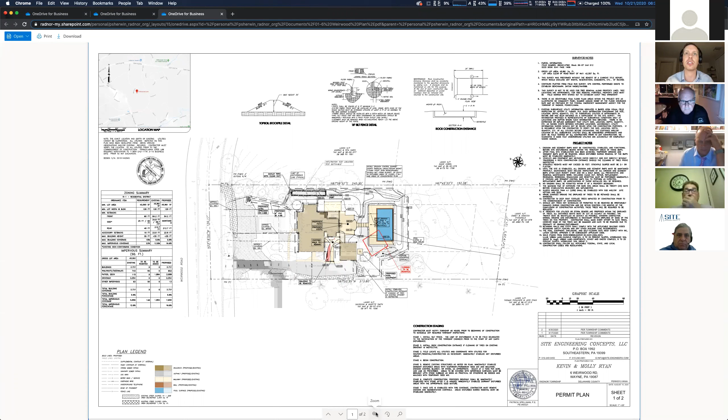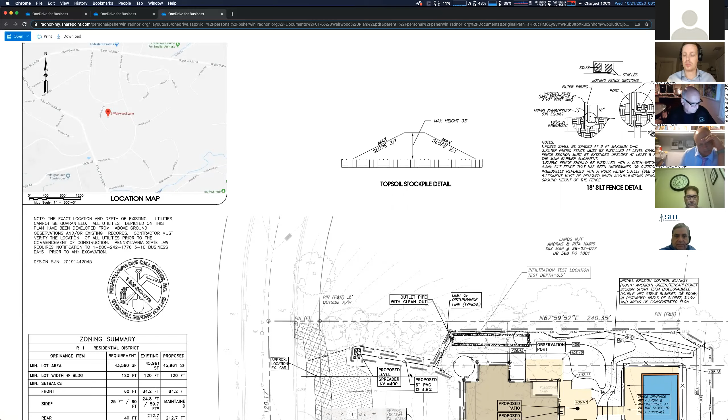What we just need to see is any tree protection, ingress, egress, and activity around those trees. If you could zoom in around the backyard pool area, including the driveway, that would be a good place to start. How's that? Good, I just have to move these pictures.

So what they're doing is putting in a pool and patio in the backyard. The backyard slopes towards the house, so we built a patio off the back of the house, sloping it away from the house, and having the water diverted around the pool. We'd come in from the driveway on the bottom of the page for access. There's a tree right there, and past the detached shed, another tree which they would like to protect. We have tree protection fencing there, and along the back, we have tree protection fencing.

Stop - that first tree you came by was there a year ago, and we surveyed it. No, I'm sorry, the second tree - go up the page a bit more. Yep, that one, stop right there, you can just see it. That tree apparently was damaged and had to be removed. There's another tree right behind it, which is being saved.

So the tree protection fencing is going to stay. Going to the top of the page and back down the side is the tree protection fencing along the swale that we need for stormwater. And then towards the middle of the property is a stormwater basin that is required for the project.

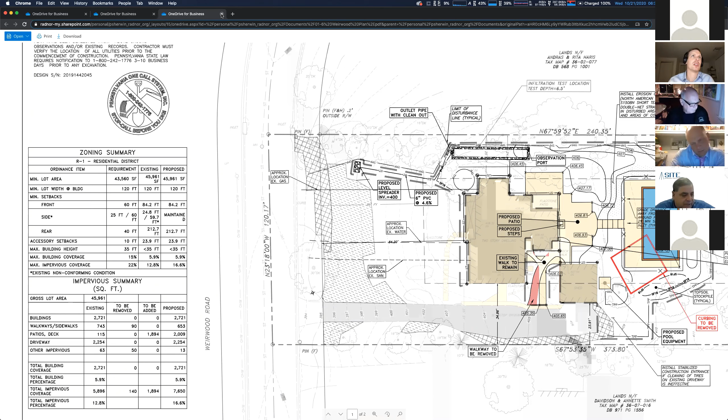Sounds good. All right, moving on to the next property address, 112 Dovecote, new dwelling.

Who's on the line? Seth, hold on a minute. Was that unanimous? Everybody said yes? I believe I caught everyone, but speak up. Thank you. I'll do the full video grid view so I can see it next time. Okay, thank you. Yep.

All right, anyone from 112 Dovecote on the line? Doug Knox here from Craft Custom Homes. Great. Hi, Doug. How are you? How are you doing? All right.

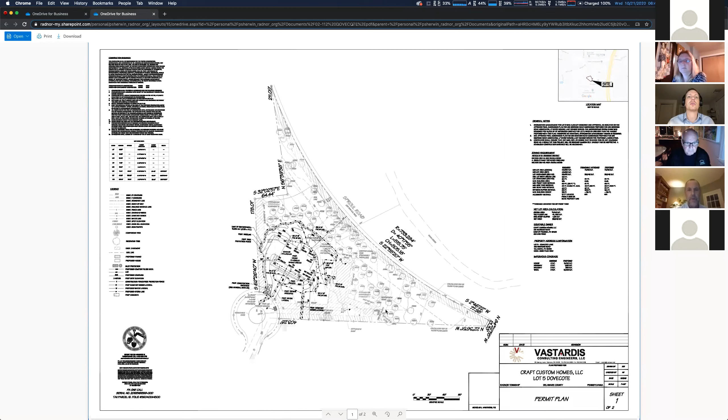Page 1 or page 2? Page 1 gives you a pretty good overview of the lot itself. Lot 5 is an approved lot, and I believe it's called 615 Newtown Road, the subdivision. It's the final lot within the community. We're staying within the boundaries established under the original approvals of the lot itself. You'll see there's a large stormwater management bed area off to the right side of the lot, and that system's already installed. It's part of the community stormwater system, so there's no more disturbance happening over there.

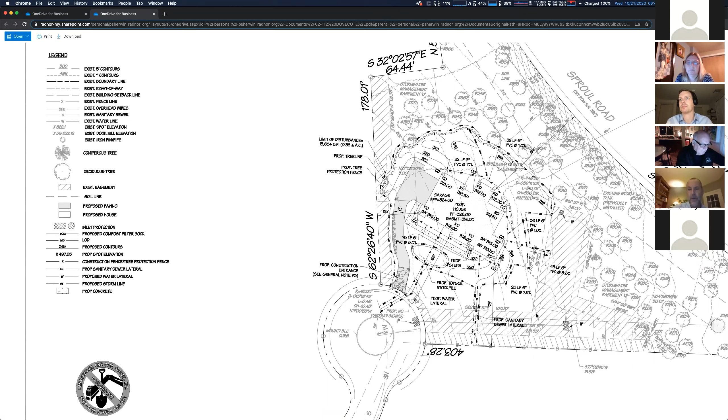We did submit an amended plan today based upon the engineering comments, and the tree protection and silt fencing have been modified to better protect that area.

Okay, Trish, do we have that updated plan by chance? It was not uploaded, no. Okay, I do have a copy I can share on my computer if you like. Yeah, if we could go ahead and do that, that would be great.

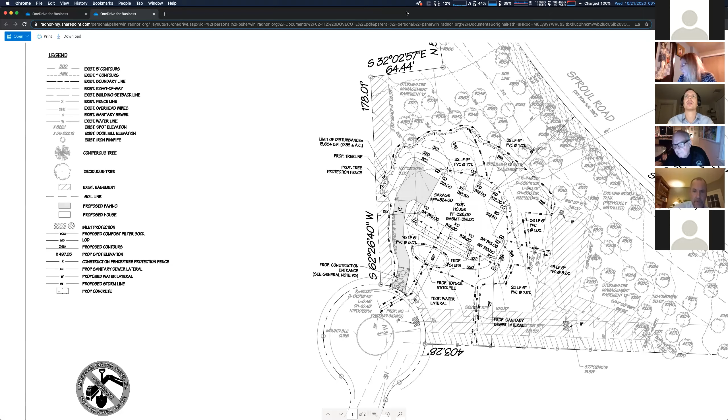I will stop sharing. Okay, let me go back into this. That's the pre-development there. Fine. There we go. Oh, come on back. Can you see this? Nothing yet. Yeah. Go back into the Zoom.

Doug, if you can't pull it up, maybe you can just walk us through what the resubmitted plans look like.

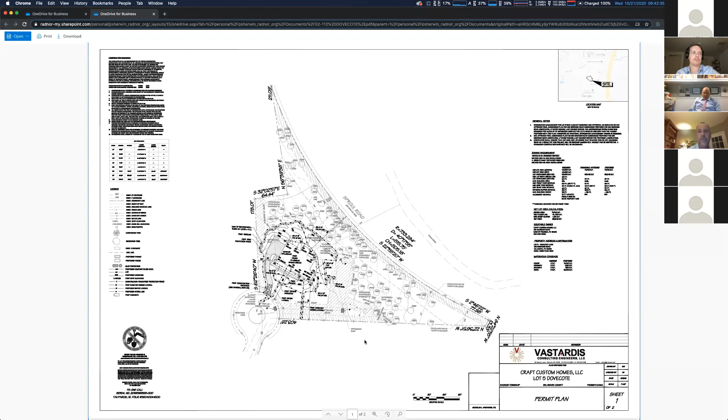Okay, what we found on the lot, due to the number of trees that were removed initially for the development of the community, there was a plan for trees being added to this lot. There's a white oak tree in the front yard, up by the curb line. We added that to the resubmitted plan and have tree protection fencing going around that. Then to the back left-hand corner of the driveway, there are 3 Norway spruce that were part of the tree enhancement package for the community as well. Those are also shown on the new plan with tree protection fencing around those.

And then some of the limited disturbance shown on this particular plan—we do need to grade the front yard some, and this was basically showing that we would not be working in those areas. We had that modified as well so that we could grade the front yard properly.

But you're not removing any trees, and there's no trees in the front yard. Correct, there's a tree in the front yard that was planted by the developer. It's a smaller tree. No large mature trees, correct.

Great. I'm going to interject just for future reference for any consultant: if you send us a revised plan the day of the meeting, during the busyness of the day, that's probably not going to make it onto the agenda to amend it. No, I understand. We require a week out. So I just want to make sure everybody understands, when something comes in along with the other 50 plans that come in during a day, that's not going to work for something like this. So that's why we're stepping through it as we are.

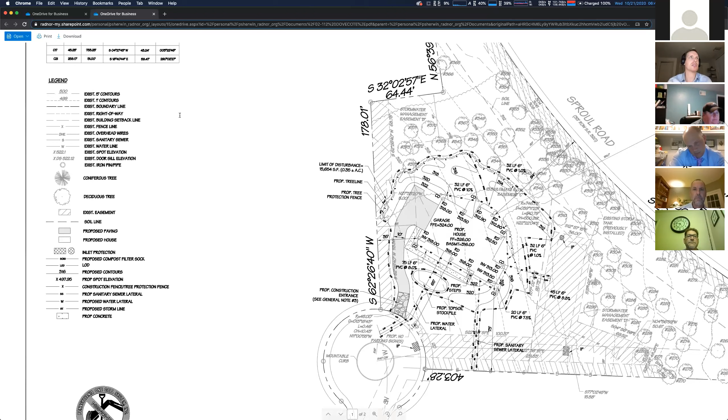Sure, yeah, I'm fine with that. Any concerns from the commission? No. Okay, all in favor of approved with revisions as mentioned? Aye. Aye. All right, thank you, next.

Next address on the agenda, 27 Fariston Road. And who do we have to represent this property?

If you're speaking, you may be on mute. Oh, there you are, hello. My name is Chris Yohn, I'm the civil engineer for this project. Hi, Chris, how are you? Good, how are you doing?

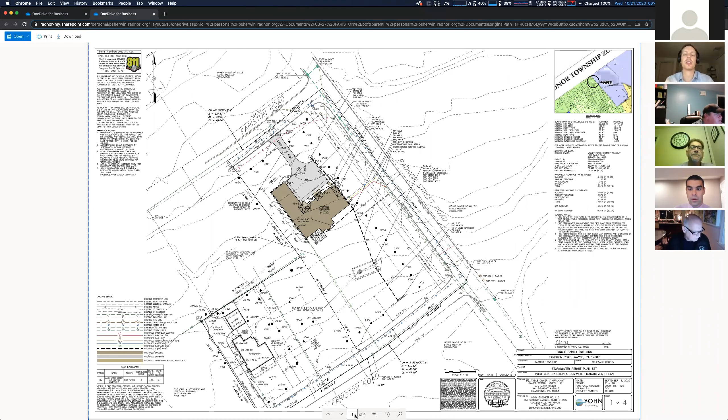Good. So really, we just need to see ingress, egress, what dirt you're moving, and any tree protection you may have. Is there a particular page you want me to go to? We can start with sheet 1. Okay, so right now this is a vacant lot.

You can see the trees that are there are these black dots. This in brown is the new house, a new driveway, a new single-family dwelling. There's grading shown on the plan, although not a lot of grade lines. The way the site grades actually works fairly nicely with where we're putting the house. There are a few grade lines on the left-hand side of the building just showing a swale along the side of the house. Same thing on the right, but we're basically holding the grade at the back, filling a little for the driveway courtyard in front.

The intent is to keep all of the existing trees. We don't have any designated to be removed. There's a nice row of dogwood trees along the existing street here, kind of pushed back behind the right-of-way, behind an asphalt walkway, but the goal is to keep those trees. I know the development's pretty close to some of them, but we're going to try to keep those. So this is sheet 1.

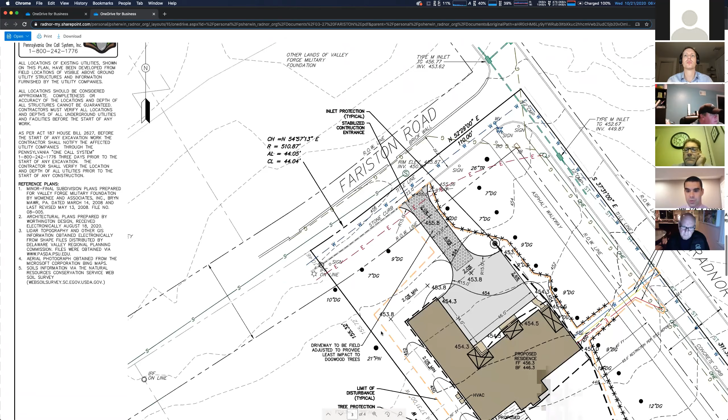I believe if you scroll to sheet 3, you'd have the tree protection fencing, that's the line with the X's through it on the right-hand side of the building. Is the tree protection currently installed, or is it to be installed? I don't believe it's installed yet.

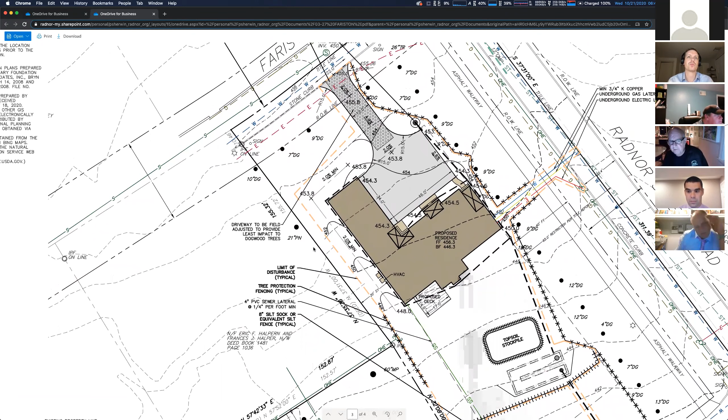Okay, Matt, did you get a chance to look at this? I did, and my only concern was the neighbor's tree. They have a couple of trees pretty near the line of disturbance, so I don't know how close construction is going to get near that line. If it's not going to be involved with those trees, that's fine the way it is, but if it is, I would like some protection for the neighbors.

Just to think, there's tree protection down by the 60-inch maple, I think that is. You talking about the Halpern residence? Yes, correct. I couldn't tell how the construction is going to impact those trees.

But if it's possible that it will, I would protect them in some way, Chris. Okay, we could add some additional protection. We do show some for the 60-inch maple, but we could show some tree protection fencing by that 21-inch pine as well, if you think it's necessary.

Matt, I have it up on Google Earth here. It looks like that 60-inch maple, probably a red maple, and the 21-inch pine. They're pretty far away. Yeah, they're far enough away.

And Matt, were there any concerns with the trees out front here by the right of way? No, like John says, they're pretty much out of the area of disturbance, I think.

Any other comments or questions from the commission? All right, so approved with that one minor addition around the 21-inch pine, if necessary. So all in favor? Aye. Thank you, Chris, appreciate it. Thank you for your time.

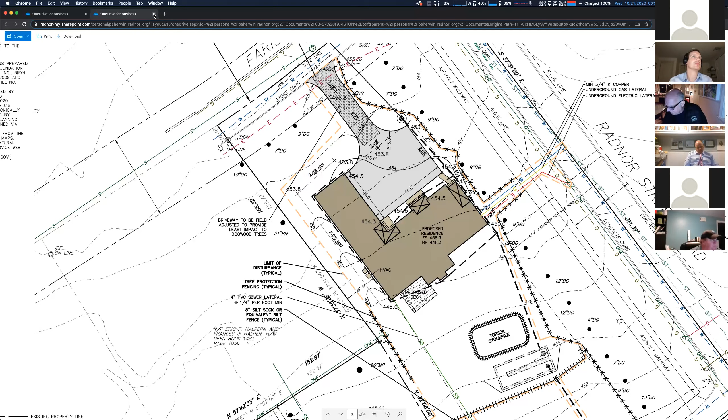All right, next on the agenda is 227 Windermere Avenue. So who on the line do we have to represent? Michael Neilio from Anthony and Sylvan Pools.

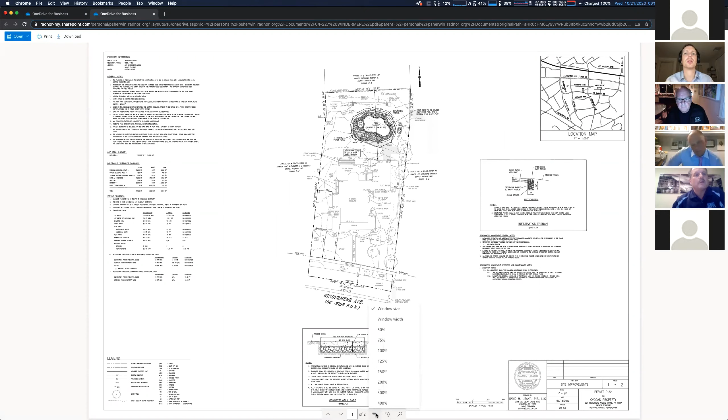Hi, Michael, how are you? Okay. So ingress, egress, where you're moving dirt and tree protection.

Which page, sir? If you go down to the street, that's page 1. If you go to page 2, it's got the tree protection silt fence detail, entrance detail. So we're coming in off of the road on the left-hand side. We have our stone construction entrance there. All the way up the left-hand side, the only thing from a vegetation standpoint is right on the property line, a little 6-inch tree there and a 4-inch tree. Nothing else until we get to the backyard where the pool's going.

We show our limit of disturbance around the whole project plus our silt fence. And the closest tree is this 48-inch tree right here, which the homeowner wants to do this project without removing that tree.

What about the 18-inch tree that's right below the pool equipment? Is that area where the pool equipment is going to be a patio? Right above that, is that going to be a patio, or what's going on there? You mean above the 6-inch? Yep, where the pool equipment is. Yeah, it's an area we usually level out. It's 8x5, we compact crushed stone on that 8x5 area and put down 2 precast pads, precast plastic pads right there that the equipment sits on, so that's going to be pretty level with the elevation.

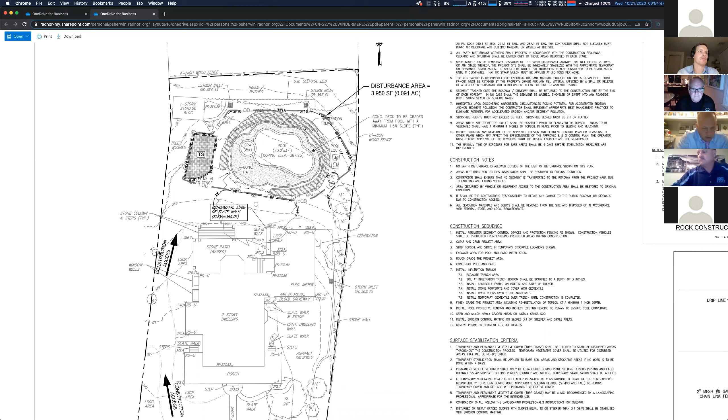That's pretty close. Yeah, you usually do. Yeah, it can be added, that's not a problem. I'll have them add the tree protection. So we're going to note the 6-inch tree is going to have protection, and it looks to be a 4-inch tree, correct? Yes.

Also, this is the homeowner, Nicole. Back by the pool, that 6-inch tree has been removed. Okay.

So in that case, technically, according to the ordinance, anywhere from a 6 to an 18-inch tree does need to have 1 replacement tree planted, that's 6 inches measured at diameter at breast height. Unfortunately, it's already been removed, but did you take a measurement at breast height by chance?

Seth, I don't believe they need to replace that. It's only if they did 5 trees or more. Correct, that is correct, my apologies. As a homeowner, they can do that. My apologies. We would like to see the tree replaced, though, I will say that. Yes, agreed.

Okay, so we're recommending tree protection on the 4 and 6-inch. Matt or John, any concerns with this large tree in the back? It looks like, if anything, there's going to be dirt and material added versus dug down in, so root disturbance technically should be minimal.

Okay, and obviously just recommend getting that protection fence as close to the drip line as possible, but it looks like you already are recommending that according to the plans. All right, before we vote for approval, any other questions or comments? All good. All in favor with those 2 additional protections added?

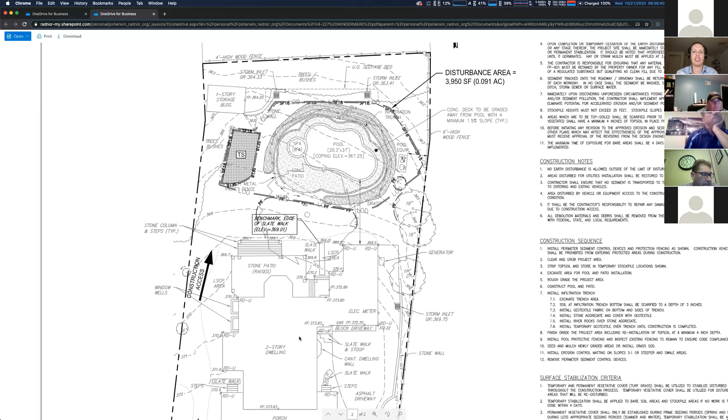All right, moving down to 413 Wyldhaven Road. Patrick Halen, I'm an engineer from Mom Inc, and I'll be presenting 413 Wyldhaven.

Great, welcome Patrick. So just ingress, egress, where you'll be moving dirt around, and tree protection. Which page would you like? So we'll start at sheet 1. So you pan over, you can see the asphalt drive that comes in off of Wyldhaven. They'll be utilizing that to get to the work area, which will be in the rear of the property.

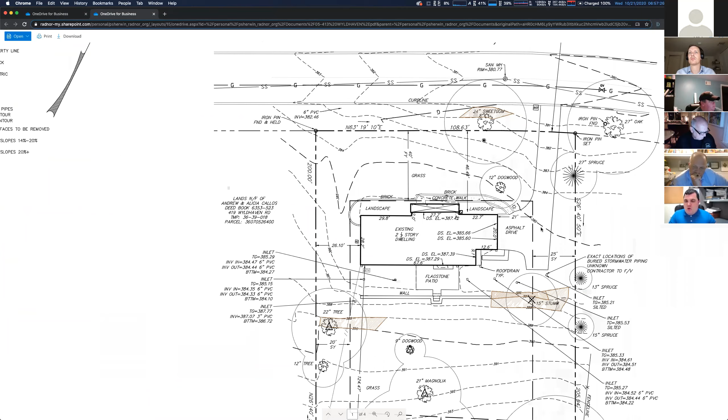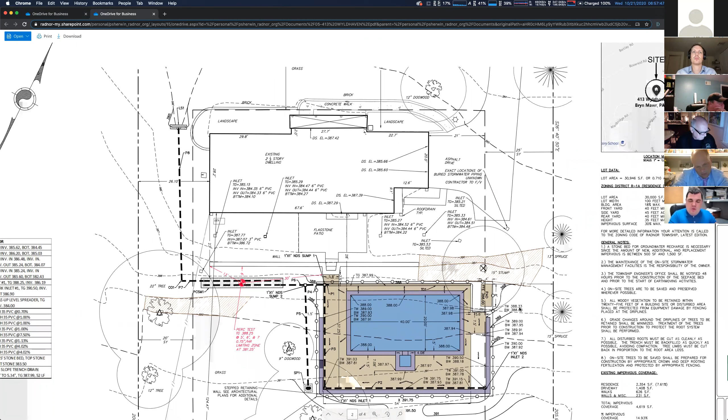So the next sheet is sheet 2, which will show the proposed pool. The E&S sheet will show more details about how they'll get back into the site from that end of the driveway, but this is generally what they're going to be doing. They're going to be excavating the dirt, constructing the pool and patio, the retaining wall, the equipment pad, and the required stormwater management system, just a small infiltration trench. They'll be excavating dirt back to put in that patio, and also doing a little bit of grading behind that retaining wall to divert stormwater downhill and away from the pool patio.

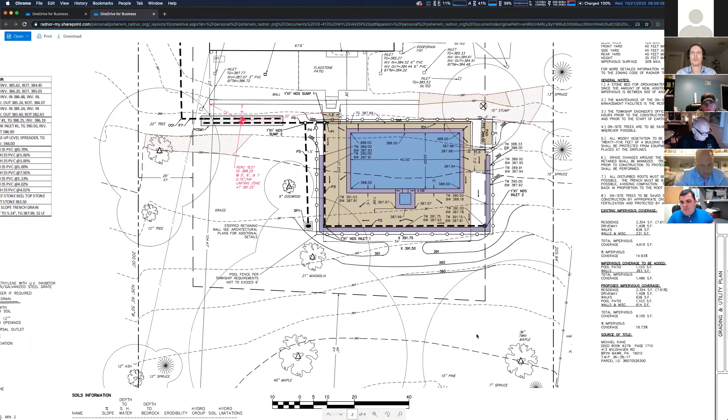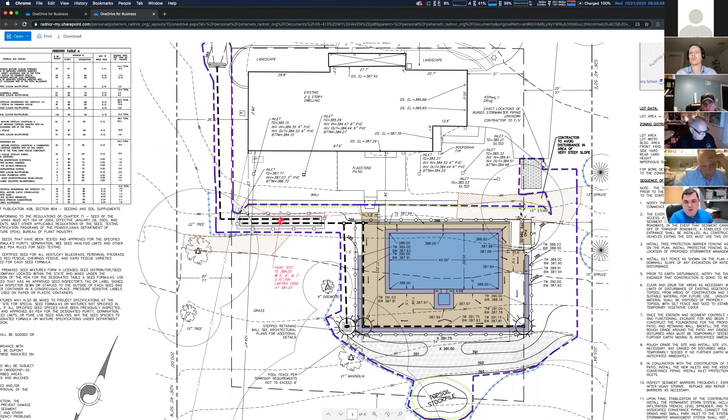So if you pan down on the sheet, those are the little swales right there. On the third sheet, which is our erosion and sedimentation control sheet, that's our proposed limit of disturbance. There's the construction entrance coming off of the rear of the driveway, and this also shows the tree protection fencing. They are going to be removing one 15-inch stump, but there are no other tree removals proposed on this property. We are going to try to save this 21-inch magnolia, which is right by the lower left-hand corner of the pool patio.

The other technically impacted trees are the 22-inch tree on the left-hand side -- just the drip lines are clipped by the disturbance. They'll just be building the stormwater management system there, which will outlet to a level spreader. The other impacted tree is the 9-inch dogwood, immediately adjacent to the pool patio.

And the other 2 trees are technically disturbed, but not really going to be disturbed -- if you pan down the sheet, it's just the 40-inch maple and the 36-inch twin maple. We do wrap the drip lines with tree protection fencing, but it's mainly just some grading to come down to the swales. That's why we're indicating those will be impacted, because of the drip lines.

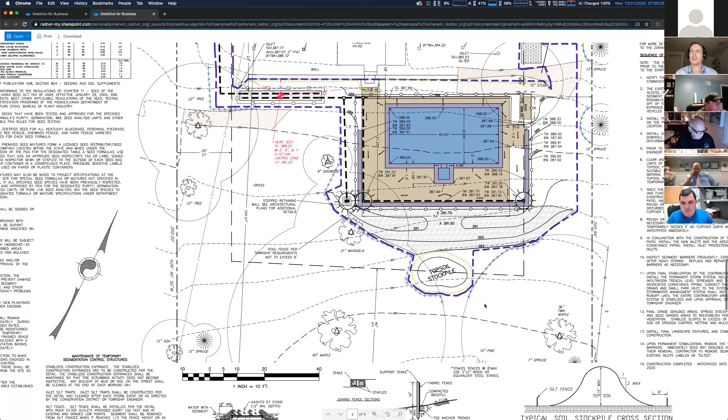Do you know about how many inches of dirt you're going to be covering down to this area? There's no grading going on back there. Oh, okay, misunderstood. Okay, and this 15-inch tree that was previously removed? Yeah, the tree was previously removed -- our survey picked up a 15-inch stump. Understood. Well, thanks for going through that.

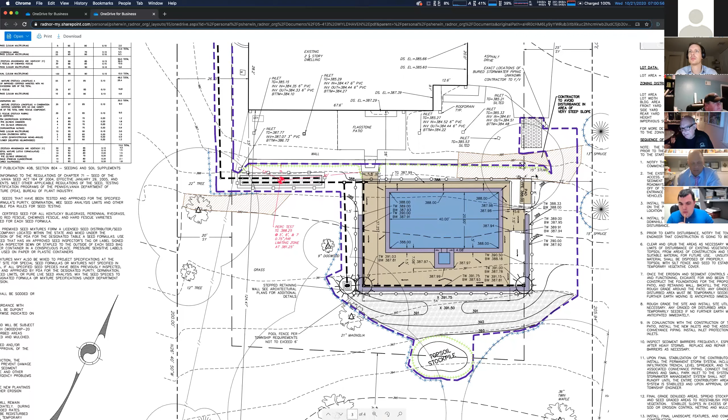Matt, were you able to do a site visit? I was. I didn't see much, but looking at the plan, Seth, the tree protection is impeccable -- this is what I want to see every time on a plan. Absolutely. Yeah, this looks great. I agree.

And just one quick thought on the stormwater management over here -- could you speak a little bit more in detail what's happening? So we haven't gotten any comments back from Andrew Zerby yet, but this is less than 1,500 square feet of new additional or replacement impervious. So we're just being required to do some infiltration for the 2-year stormwater management required by the ordinance. We're routing stormwater from the pool patio and a little bit of the yard area to that infiltration trench, and then routing it around the house to a level spreader so it can discharge to grade in an unconcentrated manner and flow down to Wyldhaven Road. Sure, thank you.

Okay, I don't have any further questions. Any other questions from the commission?

Just really jealous of all the pools going in right now. I think we should add into the ordinance that we get a free pool pass. Yeah, for any approved pool. Agreed, for the entire summer. That's right.

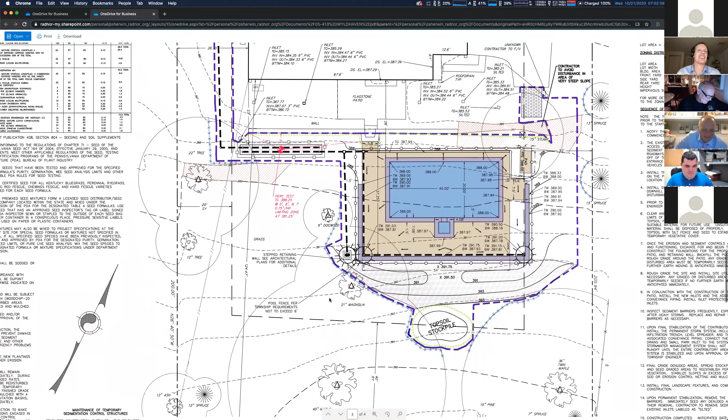All right, moving on to 443 Barclay Road.

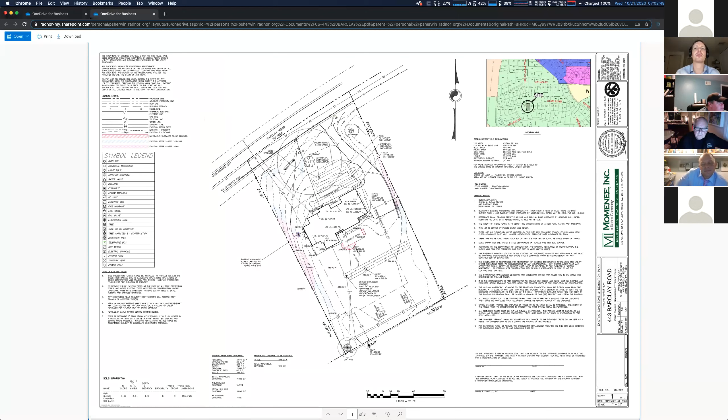And who do we have to represent this property? Dave Fiorello from Momenee. Hello, sir. How are you? I am very good. How about yourself? Doing all right. All right, we also have another pool.

Another pool. So, ingress, egress, dirt being moved, and any tree protection. Well, one thing I wanted to point out is that this project was in front of the shade tree a couple years ago for the new house construction. As part of that plan, there was a pool proposed, but it was never constructed, and the permit was closed out. Now the homeowner is coming in with a pool of a slightly different configuration than the previous plan. But I wanted to point out that the shade tree has pretty much seen this before.

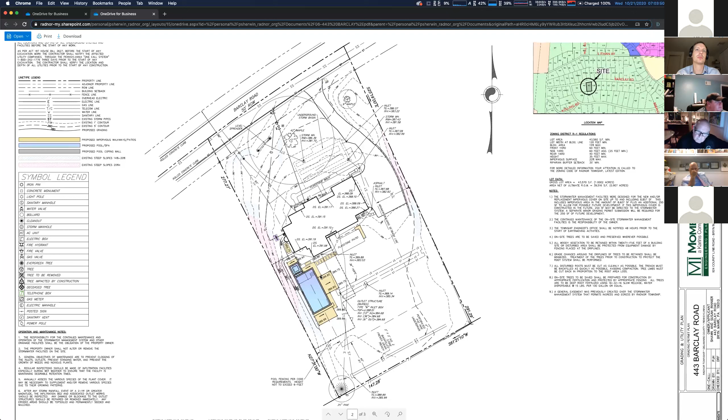In this plan, if you go to sheet 2, it shows the proposed pool in this corner down there. Their access, I think, is shown on the 3rd sheet, which comes in through the existing driveway. We maximized this a little bit. So we're coming in through the existing driveway and coming around and putting the pool in generally the same location as before, but the other pool was more free-form, and this is more rectangular. So we've got really no trees per se in this backyard.

Are there any trees up towards the ingress, egress where construction equipment may be coming in and out? There is a tree along the front. If you go back to the prior sheet, there's a tree in the front yard, a 42-inch maple that was preserved when the house was put in. Existing maple tree. I think they're far enough away from the driveway that we shouldn't have any issues.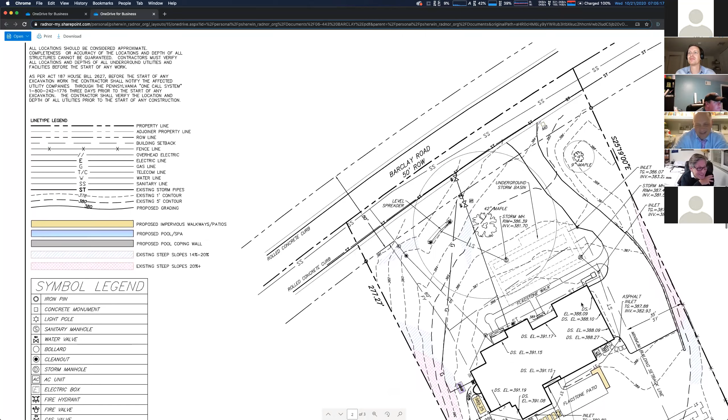Okay, Matt, were you able to do a site visit? I did not make it to Barclay Road. I didn't see any tree protection fencing, and I didn't see any trees except the 2 at the front, so I'm not sure we have a tree protection issue. Sure, and it looks like these two are far enough away from the drive where there's no issue there. Okay.

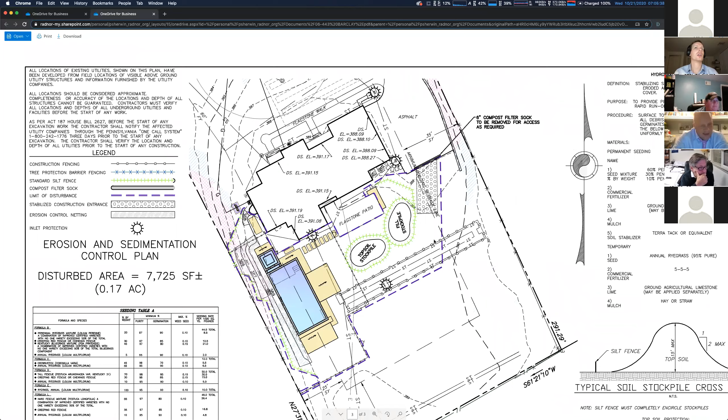Anyone else have any questions or comments? Thank you, Dave. Yes, thank you. All approved. All in favor of approval? Aye. Right. Thank you, guys. All right, thank you, sir.

Moving on to 767 and 769 Newtown Road. Bring up those plans. That's me again. And same spiel. This is one of the existing twin houses that was part of the Ardrossan Farm, located along Newtown Road. This was actually part of the Ardrossan subdivision and was assigned its own lot. Again, it's an existing twin house, and you may recall seeing it with twin garages on either side.

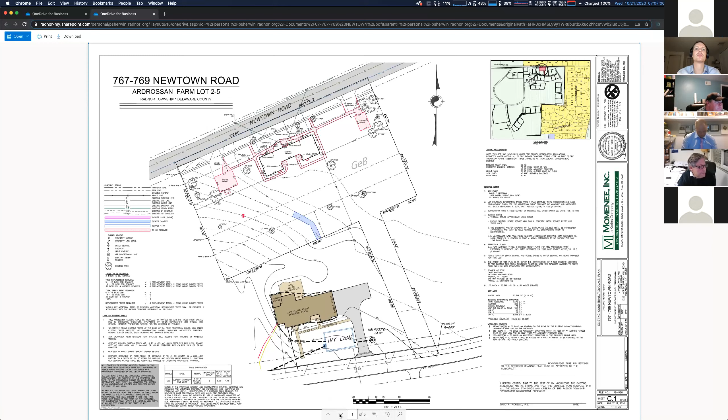The proposal here is to demolish the 2 existing garages, remove the walkways and items shown in red on this plan, and then construct new garages in the same general location, plus an addition off the back of the building, shown on sheet 2 of your plans. The garages were actually shifted away from where the old garages were. We were in front of the zoning hearing board last year and got zoning approval for the placement of the garages and the building addition.

We're utilizing the same openings in the wall along Newtown Road for the driveways, basically using the same driveways, but the buildings have been moved away from the cluster of trees in that general area. Where those foundations were, we're carefully going back and adding a gravel driveway in those locations. We have a stormwater system shown where your cursor is, a subsurface system. We're collecting roof runoff from the buildings and from the driveways where we can, taking them to that system.

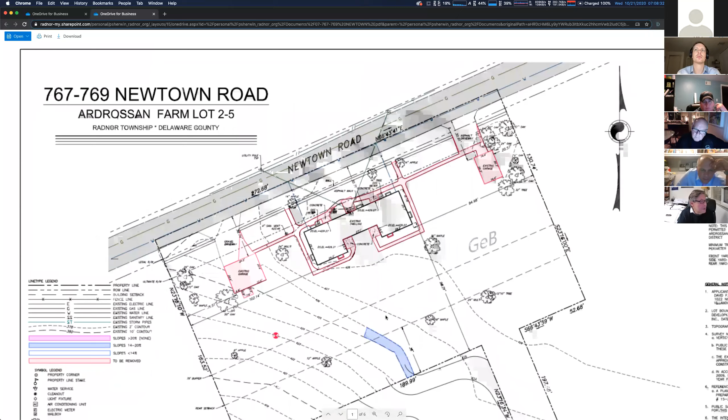That provides both groundwater recharge and stormwater rate control. We are removing a couple trees, and on the first sheet, as you scroll down on the left side, there's a list of 3 trees being removed. One of them is a 36-inch maple, which is a heritage tree. The intent was to try to save it, but with the building addition coming out the back and its proximity to that tree, we didn't feel it was viable to keep. So that tree is being removed, along with a couple others closer to the front of the site, including a small oak tree in the northeast corner.

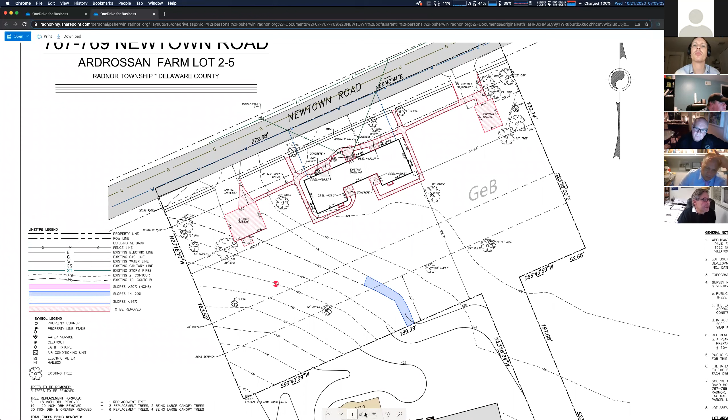So a total of 3 trees coming out for a total replacement. We're proposing 8 new replacement trees.

We're showing trees on the plan. They do have a landscape architect involved here, coming up with a landscape plan. One plan is to establish a row of evergreens along the back of the property, but we're also showing the required replacement trees that are required for the ordinance. That's on sheet 2, I believe.

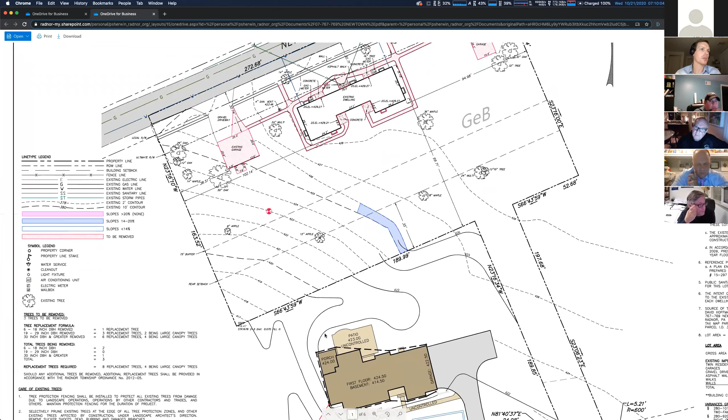So all of the green trees are the proposed new trees, correct? Yes. And then sheet 3, we have our erosion sediment control plan, which should include all our tree protection.

So we have tree protection around, trying to protect the trees in the area of work. We have tree protection around the areas where the old garages were, and those areas will have proposed pavement, but that pavement is gravel—we're proposing gravel in lieu of asphalt there. So we have tree protection elsewhere and around the trees we're trying to preserve. All that is shown on the plan.

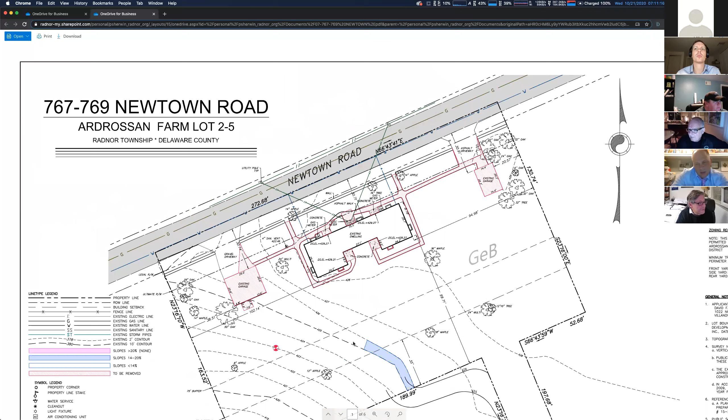Hey Dave, do you know what species of maple that is, the 36-inch? No, I don't, I'm afraid. And the condition of the tree, I couldn't tell. Is it average? I mean, that's an old tree. At Matt, out there at Ardrossan, there's a ton of large Norways out there. Yeah, well, that's certainly not going to be an issue, I don't think, taking that. Okay, sorry guys, I'm not a tree guy.

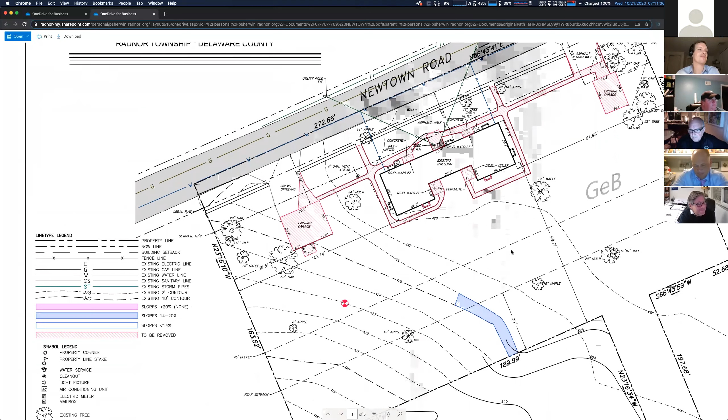No, I mean, if it's a 36-inch sugar in great shape, you don't want— oh, yeah, sure, I agree with you. But as John said, these trees have been out there. You may recall, with the one storm we had, there was a tree on top of one of the garages there. They probably have not been taken care of over the years. With the new owner in there, I know he is very intent on preserving the area and doing what he needs to make that a nice piece of property.

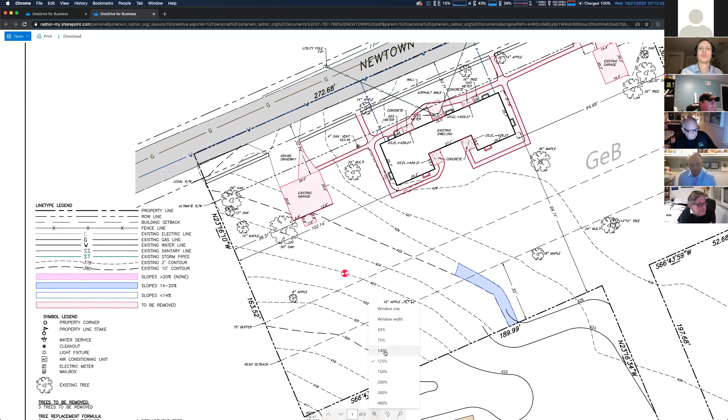Yeah, I noticed it says Mr. Hoffman is the property owner. Yes, and I believe he has a few other properties in the area, and he does a really nice job with them. So I'm sure it's going to turn out beautiful. I know we've done a lot of work for David over the years, and he is a stickler for detail.

So the replacement formula does check out regardless of whether it's required or not in this case. So appreciate the replacement trees.

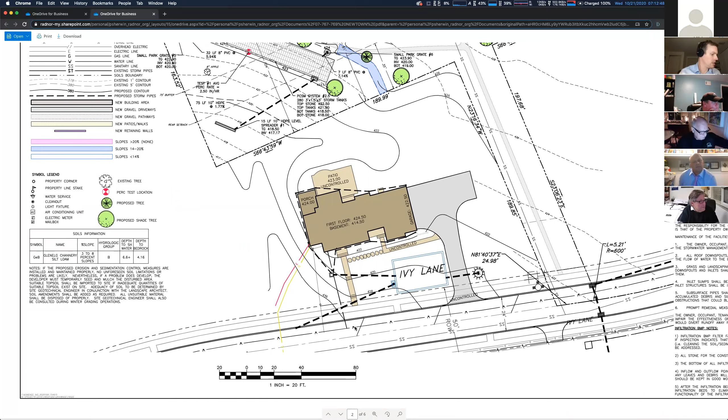Any concerns, Matt or John, regarding the tree protection? Not at all, no, it looks good. Any other questions or comments from the commission? All in favor? Aye. Aye. Thank you, appreciate it. Thank you very much, enjoy.

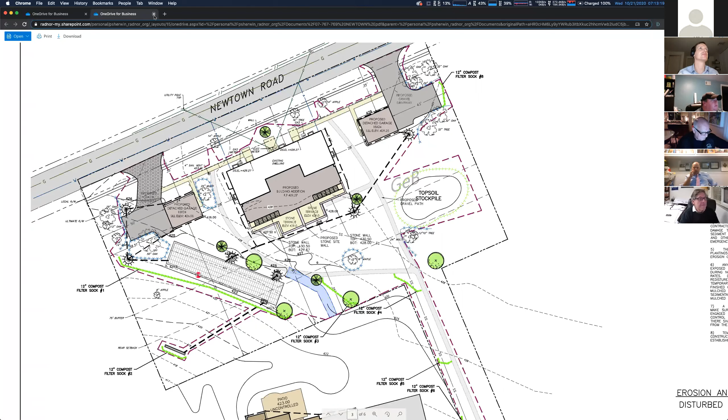All right, moving on. 220 Lenoir. Who do we have representing that property? David and Susan Miska, homeowners. Hello, good evening.

All right, so if you could walk us through ingress and egress of your project, any dirt being moved, and any tree protection you may need. Well, actually we were told we would only have to address the tree issues, so we can't talk about dirt removal, although dirt is to be removed. Okay, yeah, if you could just walk us through generally where that is on the plans, I'll zoom in.

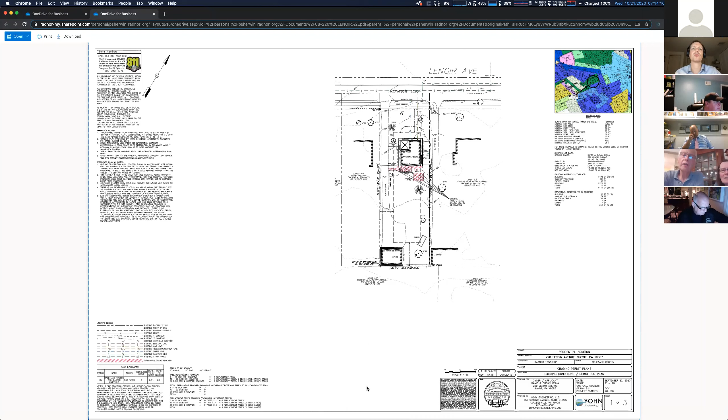Yeah, just enlarge the sheet, please. Sure, page 1? Page 2, I think. Okay, this one is good. Yeah, I guess the issue is the soil that is being removed for the addition on the back. I guess temporarily it's going to be stored in that stockpile indicated and eventually removed.

Yeah, so our main concern as the Shade Tree Commission is, per Steve's opening statements, if there's a certain amount of cubic yards of soil being moved around, then that prompts us to review your plans. Mainly what we're looking for is any disturbed trees near the soil that's going to be moved around—we just need to call that out. And any equipment coming in and out of the property, and any trees near that ingress and egress, making sure we have tree protection around those.

Yes, we understand that. There are 2 trees we intend to remove at the front of the property because they are not in good shape. The first one is that spruce there. The second one is what's indicated as a maple—it's actually a hawthorn.

Equipment moving in and out of the property will go through the drive on the left-hand side. That's correct.

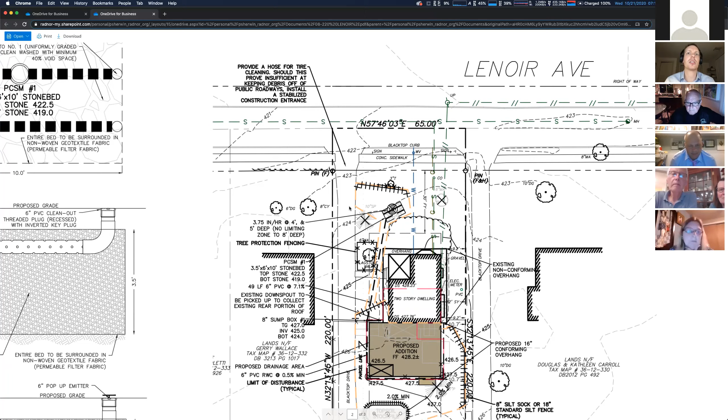So in looking at this, I'm not seeing any requirement of tree protection. Matt and John, would you agree? I agree. That's correct. Okay, any of the other commission members have any questions or comments?

All good. All right, all in favor? Aye. Great, thank you very much. Good luck with your project.

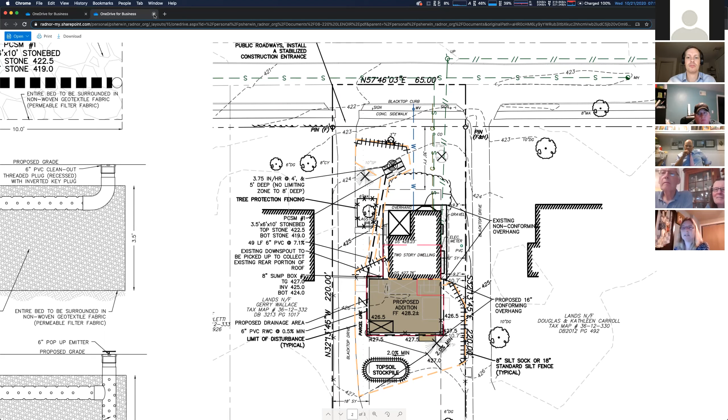Great, thank you, Trish. All right, moving down the agenda, 208 to 210 Aberdeen. Trish, is that the one where we received updated plans for? Yes. Okay, let me pull those up quickly, give me one minute.

Just for your information, the applicant was before Planning Commission earlier this month. Understood, thank you, Matt. All right, who do we have on the line for this property?

Hi, I am Christy Flynn with Rockwell. Hi Christy, good evening, thank you for having me. And we have Patrick Spellman with us, as well as Ann Walters, who is the landscape architect.

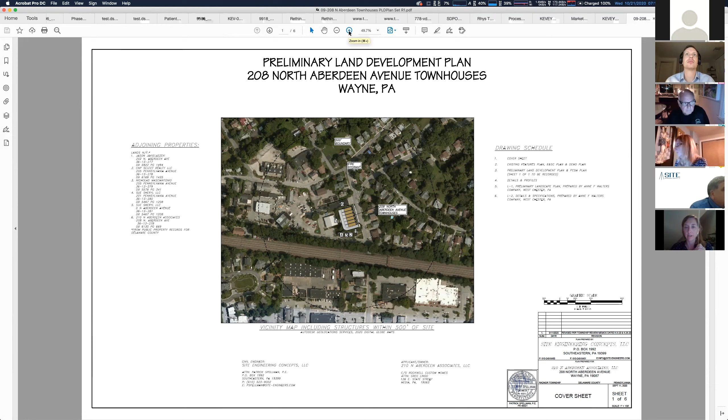So this property is on North Aberdeen, on the north side of the railroad bridge, and it was formerly used by the American Pool Company. There is an existing home on the far north side that you might not have ever even noticed because it's covered in trees and bushes in the front there. And then there's a large privacy fence that runs the length of the front of the property.

The property falls from North Aberdeen in the front, which is on your right-hand side on your plan here, down lower on the left-hand side towards the rear property line. So we are proposing 6 townhomes here.

It is a C3 zoning, and there's a C3 zoning amendment pending because it is a mixed-use area now in reality, and we've received positive recommendations from the Planning Commission for both the plan and that zoning. We have a scheduled hearing before the commissioners for the zoning ordinance, and then we would be before them with the plan. So tonight we came to speak with you about the trees.

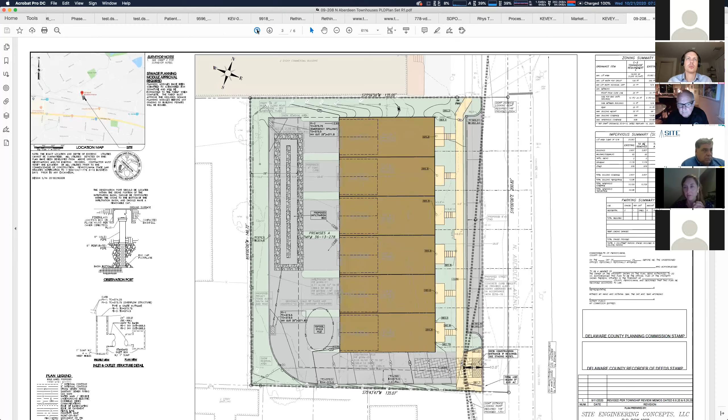I think if Matt has been by the site, if any of you have been by the site, it's really essentially a junkyard that has been here for a very long time, and there's some weed trees that have fought their way through. Over a long time, they've gotten fairly large, but there's nothing that could be defined as superb quality here.

I would agree, Christy, thank you. And so I would turn it over to Patrick, who can talk about access, and then Ann, perhaps you would talk about our new plan for the replacements.

Okay, so we would access the property on the lower right there, you'll see a construction entrance. There are 16 trees. As Christy said, there's a slope there we'll have to cut down to get to the rear of the property, which is relatively flat from that point back. There's a total of 16 trees. The tree replacement formula is on Ann's landscape plans.

So most of the cutting and filling is going to happen in the front of the property, where you see all these red X's for the trees that are coming out, and where the townhouses will be built. If you go to the lower left corner, you'll see a tree we're saving, and there's the tree protection fencing. It's hard to see around the property, but there it comes off the limit of disturbance, it's the line with the square on it, as we try to save that tree. And then in the upper left, there's 2 more trees that we'll be trying to save.

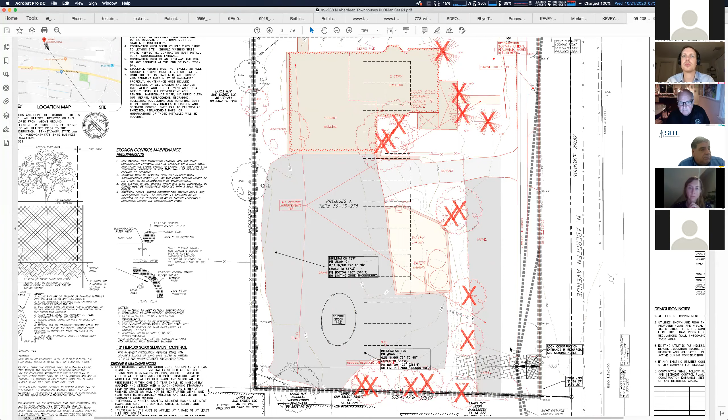Okay, so we can move on to the replacement. What page? That would be sheet 5. It may be a second file. There you go, great.

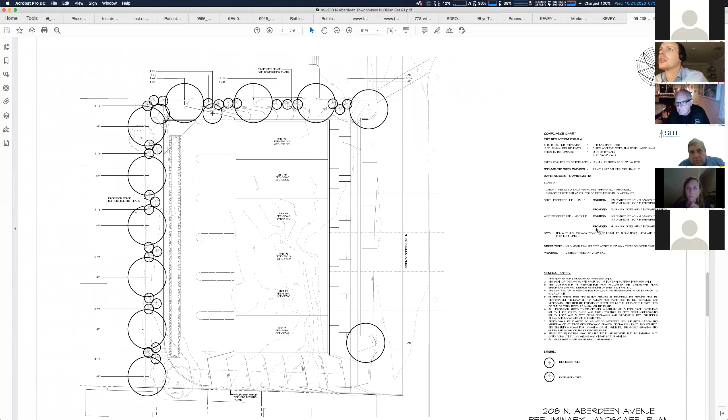All right, and if you could walk us through this, it looks like we have the formula on the right here. I'll go ahead and zoom in. So let's first take a look at the formula, and then we can look at the trees themselves.

Anne, are you there? Do you want to go through this? Sure, would you like me? I'm happy to. I was just waiting for it to come up there.

We have a list here of the sizes of the trees and the proposed replacement trees required. So you can see that 6 to 18 inch removed requires 1 replacement tree, 19 to 24 inch requires 3 replacement trees, 2 being large canopy trees. Trees to be removed: 13 total at 6 to 18 inches in caliper, and 3 at 19 to 24 inches in caliper. So trees required to be replaced total 13 plus 9 equals 22 trees at 2.5 inch caliper. And what we're providing is 22 trees at 2.5 inches in caliper with a minimum of 6 feet in height.

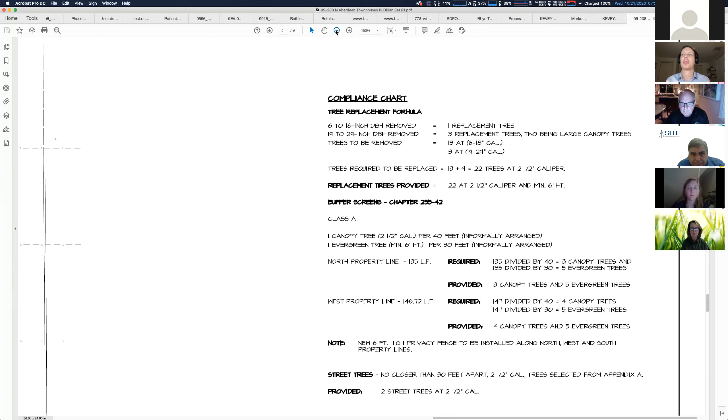Okay, the only thing we would normally like to see is with the 19 to 24 inch, 2 being large canopy, I'm sure you'll talk through this, but just calling out which trees will be large canopy trees. Okay, I'll do my best to show that. Great, okay, I'll do the math on the side just to make sure that looks good.

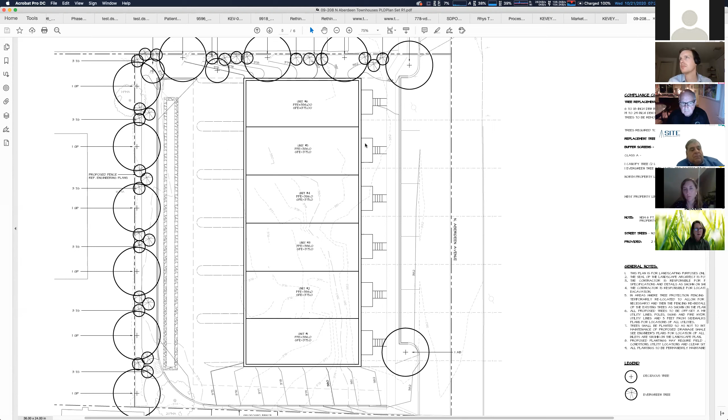But if you could then walk us through visually what we're looking at for replacements. Well, the nature of the site requires us to offer some perimeter landscaping buffering that will enhance the site and be somewhat sensitive to the perimeters and neighbors and such. But the plant material proposed is along the property lines, and we have included a number of, and I can pull the plans, but we're using green giant arborvitae. One second.

The plant list is on that page, sheet 6. It doesn't, kind of lose some of that on the screen. There is a plant list on there. Yeah, on page 6, upper right corner. Page 6, got it. There we go, thank you.

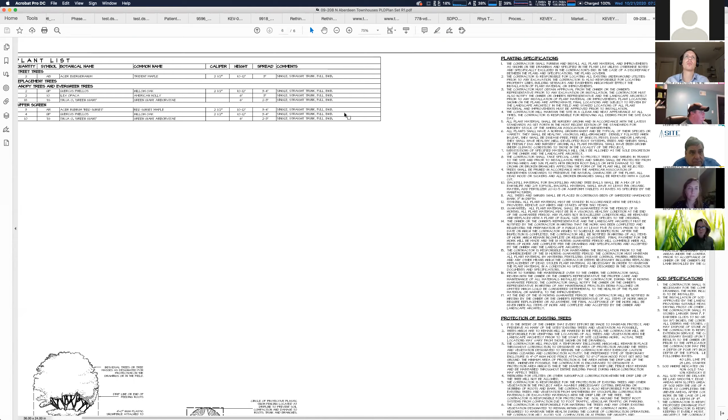Perfect, so we're using trident maples, 2 of them, because of their attributes as great street trees. They're the perfect size, they're ideal for the conditions that we have out on North Aberdeen Avenue. But toward the back of the property, the replacement, those are street trees.

The replacement trees include willow oak, American holly, and green giant arborvitae, for a total of 22 trees there. Okay, we're also including a buffer screen that includes Acer rubrum, red sunset maple, willow oak, and again, green giant arborvitae to provide some privacy and buffering and screening.

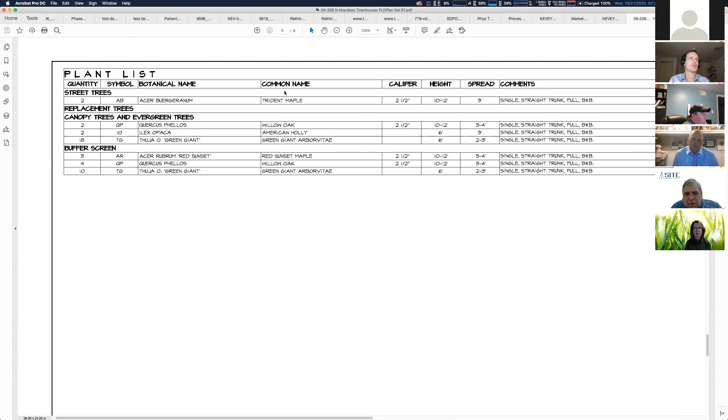Excellent. So all of the sizes of the plant material are indicated clearly in the plant list: 2.5 inch caliper where it's appropriate, 6 foot high for evergreens, back to the deciduous trees 10 to 12 feet in height. So I think we meet the requirements in terms of size. Placement, once again, I've tried to be clear, but we're offering a variety of native trees that are going to have seasonal interest without overtaking the very limited amount of space that we have on the edges of this very tight site.

Great, thank you for running through that. And yes, according to the math, so we need at least 6 large canopy trees, which looks like we have that. So we're all set from the formula side of things.

Matt, any questions, or John, any questions or comments about the selected species? They look good, and part of the reason that I think, Christy, if I'm wrong, tell me, but you created parking amenities for the neighborhood in the front of this property, and that explains why there's not a lot of street trees there, because parking is so valuable and important in this neighborhood.

That's exactly right, Matt. But we have street trees at these bump outs that are on either end of the homes, but there's currently no street trees in those locations because there is one long curb cut as it stands. And we are providing on-street parking, but with a bump out to improve traffic flow in that area. So we determined that it was just not reasonable to slam those trees up against the houses in those locations, and that the parking was more important in that spot.

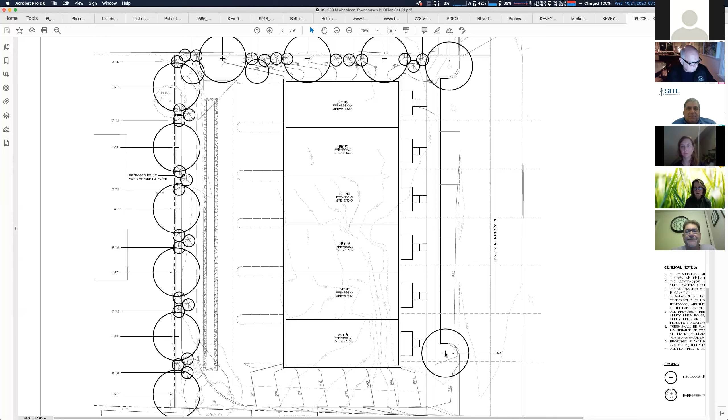Thank you, Steve. One question, Matt - you mentioned something about your tree survey, that the Trident maples did very well in the area, is that right? Yeah, exceptionally well. They're a great street tree.

Great, I agree. This looks like a great project to revitalize this little nugget of Wayne. Does anybody else on the commission have any questions or comments? Thank you, Christy, for a great job, and your consultants. All right, all in favor?

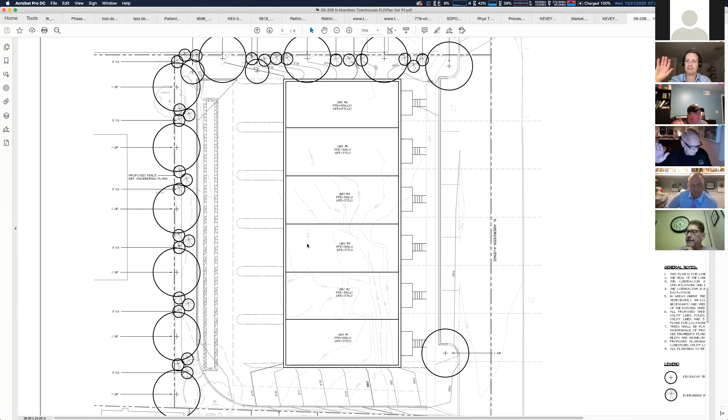Aye. Aye. Thank you, guys. Thank you. Thank you all, and gals. Thank you. Good night. Good night.

All right, so that takes us to the end of grading permits. Trish, there weren't any that snuck in, correct? I think we covered them all.

All right, agenda item number 5, tree removal without approval - none at this time. Same with clearing permits. Trish, was there another comebacker on this agenda? Yes.

235 South Wayne. Do we have someone from 235? Okay, can you see me? Yes. Before we get to you though, I just want to state for the record, item number 6, violation notices, not at this time. Item 7, old business - we'll skip ahead to 235 South Wayne so we can get that going, and then we'll get back to the fall tree planting. Let me bring up the plans here quickly.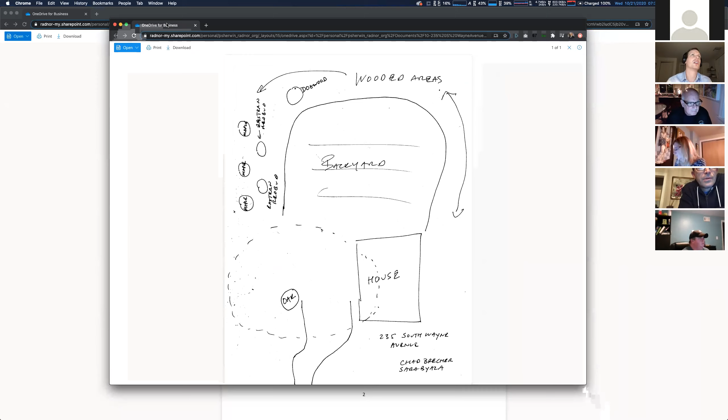If I remember correctly, what we were just asking for last time was some sort of drawing indication for the plan, correct? So welcome. If you could go ahead and just refresh our memories with the project and why you're here and the impact to trees.

Sure, and I apologize, my drawing isn't as nice as the other drawings and diagrams, but just to recap: we have a very large oak tree that's not in the greatest shape in terms of vines, and it overhangs probably about a third of the house and a lot of the driveway, and it was becoming increasingly dangerous. So the way it was left at last month's meeting was that I was asked to do a very simple, freehand diagram of potential replacement trees. So I had Peter Tracini from Tracini Landscaping, who's done work on our property, come by and walk it, and we came up with a general plan along the perimeter of the backyard, basically planting maples as well as eastern redbuds and a dogwood in that area. That's sort of what that indicates. It's obviously not the greatest diagram in terms of scale and perspective, but it's generally the left back of the backyard and towards the back of the yard.

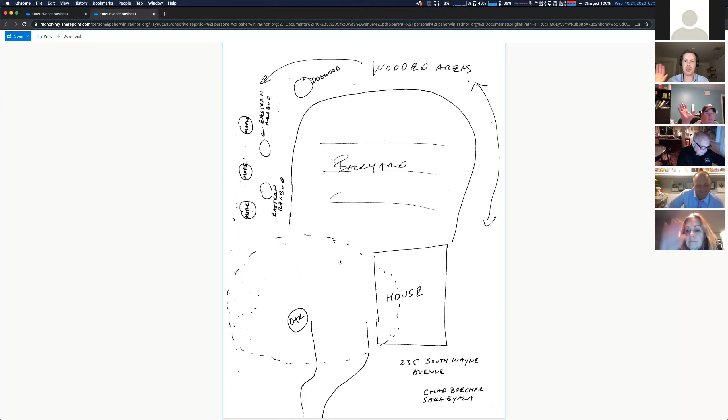All right, so approved with the mentioned revisions? Aye. Aye. And thank you. And thank you, John, for offering to help out the homeowner. Appreciate it. Absolutely.

All right, so back to the fall tree planting. Ginny, would you like to provide an overview as to where we're at with that? We are ready to go, just waiting to hear from the township as to when the trees will be available to plant. I'd like to get out a memo to all the registrants so they have an expectation as to next steps.

So real quick, Ginny, if I may, not to cut you short there - John, let me jump in for a second. Oh, okay, I emailed Ginny. So this is out to bid as we speak.

Before the Board of Commissioners on the 9th for award. Once that gets awarded, the contractor is going to get an email stating please provide the following information, your certificate of insurance, a couple bonds. Then they'll be given a notice to proceed. Upon that, and that really depends on the quickness of the contractor.

Once we get that notice to proceed, we get his schedule, and John and I have talked. There's going to be substitutions because of the time of year. Once that all occurs, then we can get Ginny an idea of a schedule and when the trees are going in. But that's after November 9th.